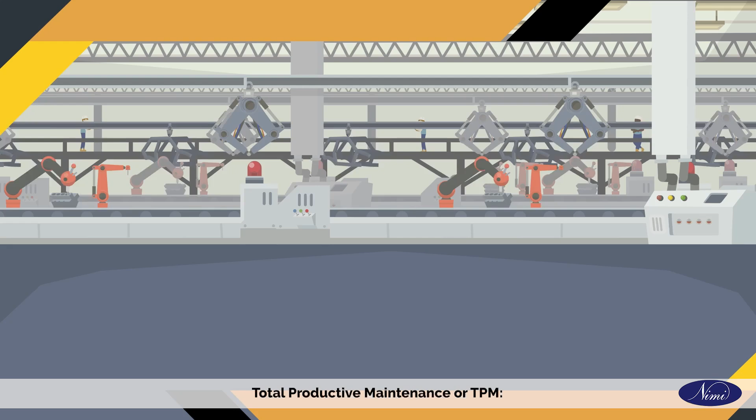Maintenance of machine involves regular servicing of equipment, routine checks, repair work, and replacement of worn or non-functional parts. In this video, we will understand the basic maintenance concepts like total productive maintenance, autonomous maintenance, and identification of defects in a lathe tailstock. Total Productive Maintenance or TPM

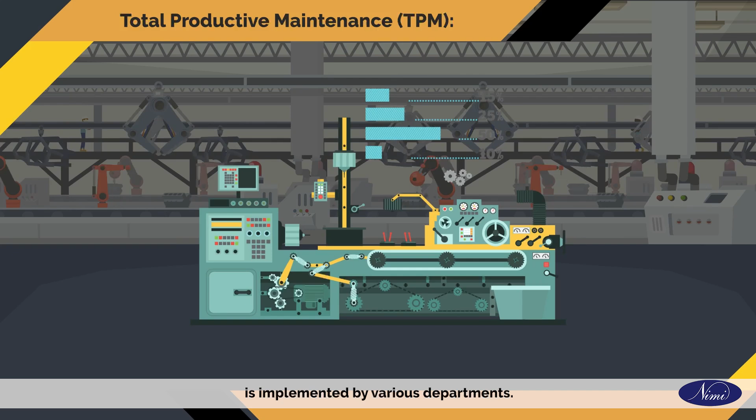aims to maximize overall equipment effectiveness, establishes a complete system of productive maintenance for the machine's or equipment's entire lifespan, is implemented by various departments: engineering, operations, maintenance, quality, and administration. TPM can be considered as the medical science of machines.

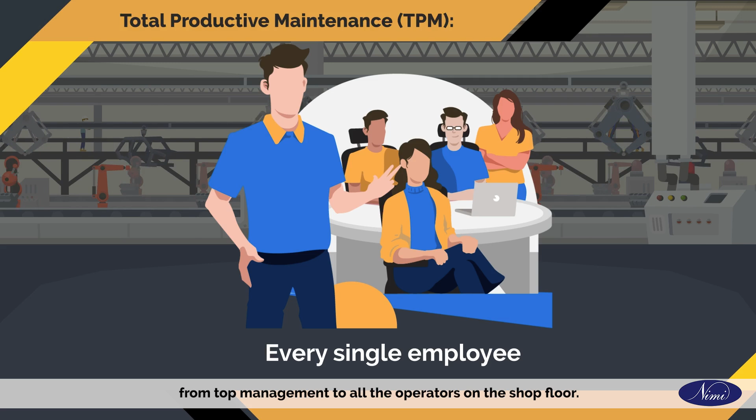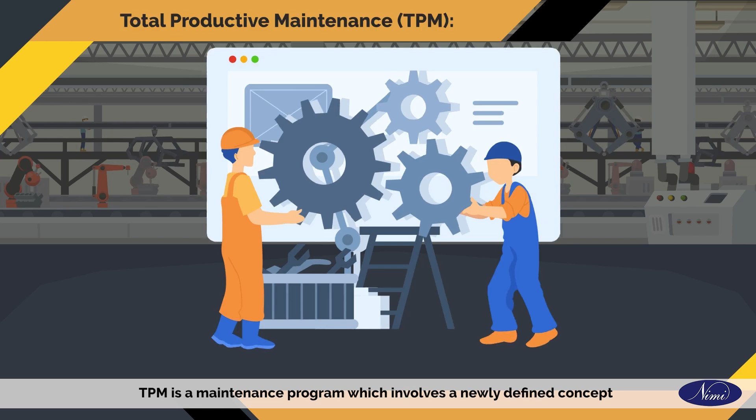TPM involves every single employee from top management to all the operators on the shop floor. TPM raises and implements productive maintenance based on autonomous small group activities. TPM is a maintenance program which involves a newly defined concept for maintaining plant and equipment. The goal of TPM is to markedly increase production while at the same time increasing employee morale and job satisfaction.

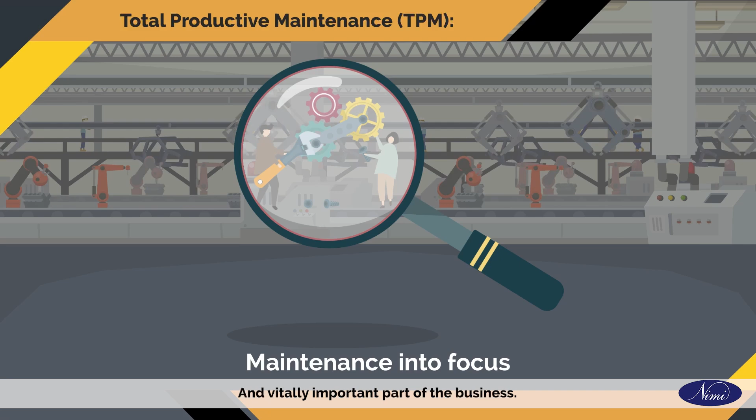TPM brings maintenance into focus as a necessary and vitally important part of the business. It is no longer regarded as a non-profit activity. Regular maintenance will minimize downtime of the machines and maximize production. The goal of TPM is to stop the emergency and unscheduled maintenance. Form different teams to reduce defects and self-maintenance.

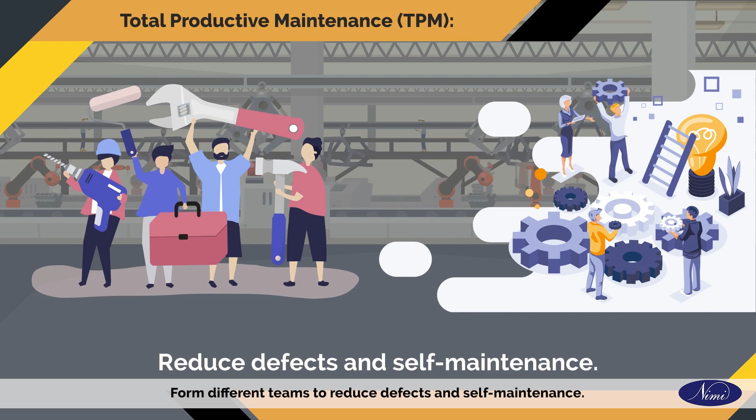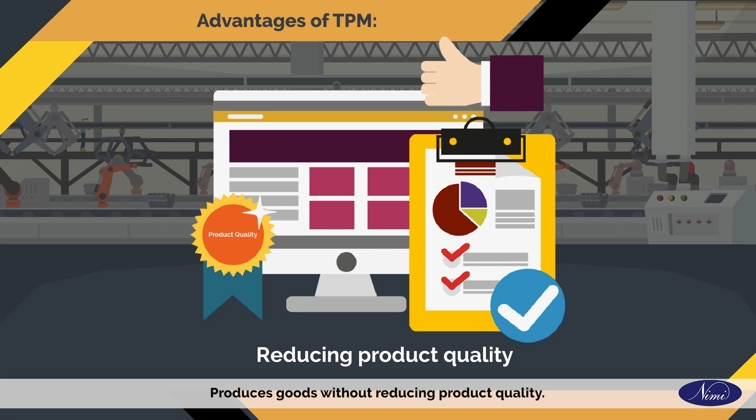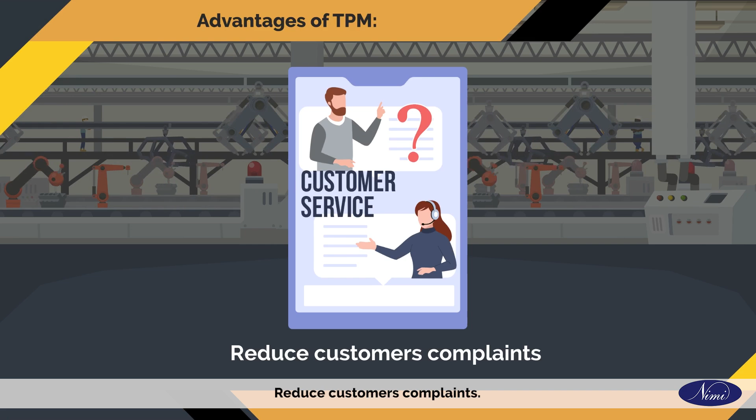Advantages of TPM: avoids wastage in quickly changing economic environment, produces goods without reducing product quality, reduces maintenance cost, produces a low batch quantity at the earliest possible time, ensures the non-defective goods to the customers, reduce customers' complaints, reduce accidents, follow pollution control measures, favorable change in the attitude of the operator.

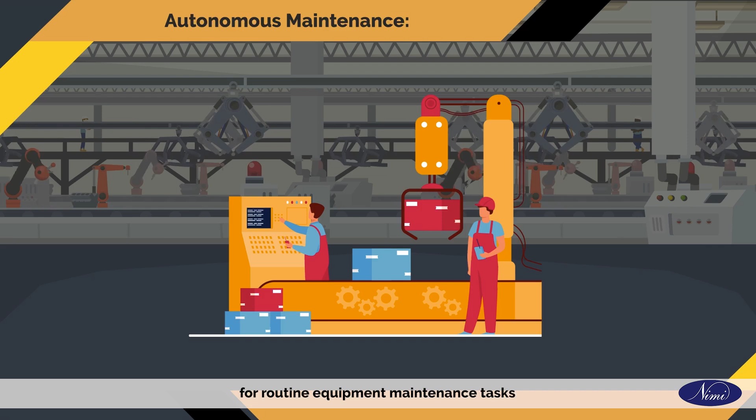Autonomous maintenance is a maintenance approach for routine maintenance tasks to keep the equipment in good condition and prevent breakdowns. Let us see the step-by-step improvement process and understand the equipment functions and safety risks.

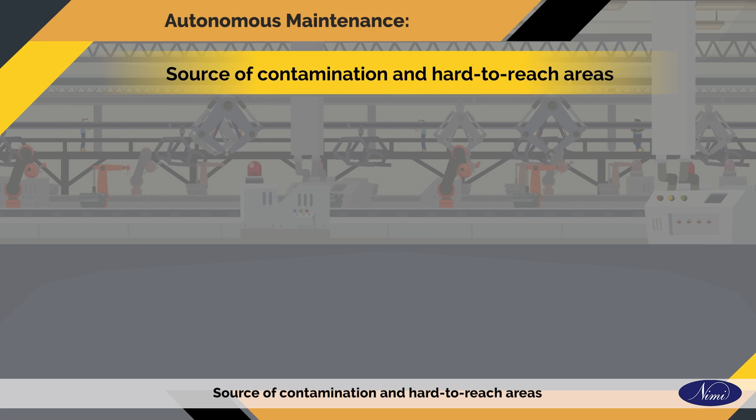The 7 steps of autonomous maintenance: initial cleaning, initial inspection and registration, detect problems of the lines and restore the original state, start managing the line autonomously, create and perform temporary cleaning or lubrication, source of contamination and hard to reach areas, solve by cleaning, inspection and lubrication.

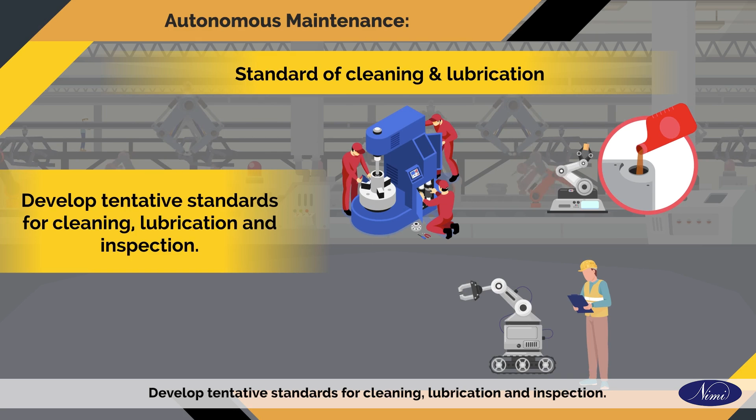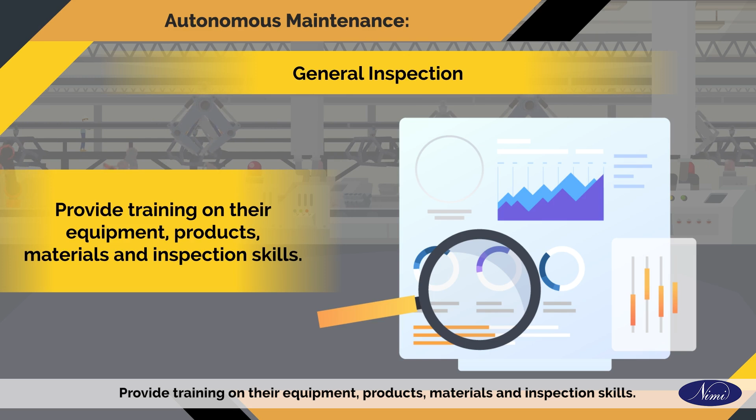Standard of cleaning and lubrication: develop tentative standards for cleaning, lubrication and inspection. General inspection: provide training on their equipment, products, materials and inspection skills. Autonomous inspection: develop a routine maintenance standard by operators.

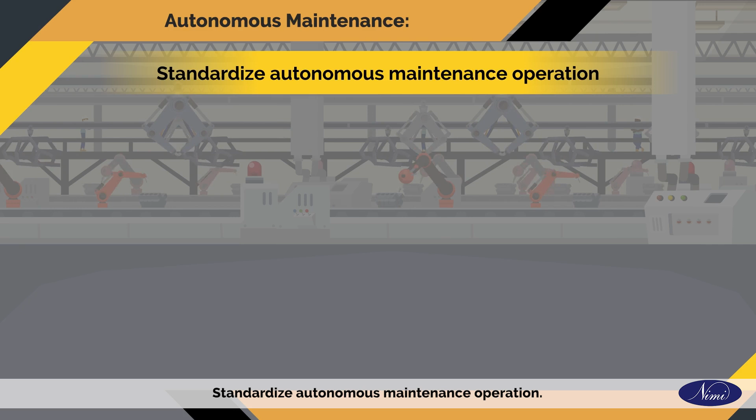Standardize autonomous maintenance operation: standardize routine operation related to workplace management such as quality inspection of products, life cycle of jigs, tools, setup operation and safety. Autonomous management: autonomous team working.

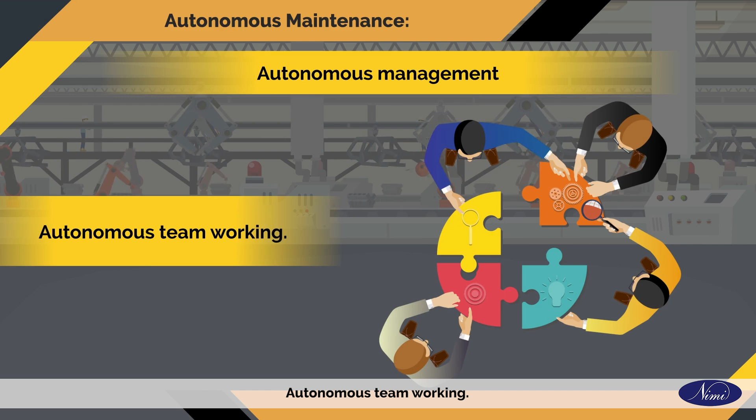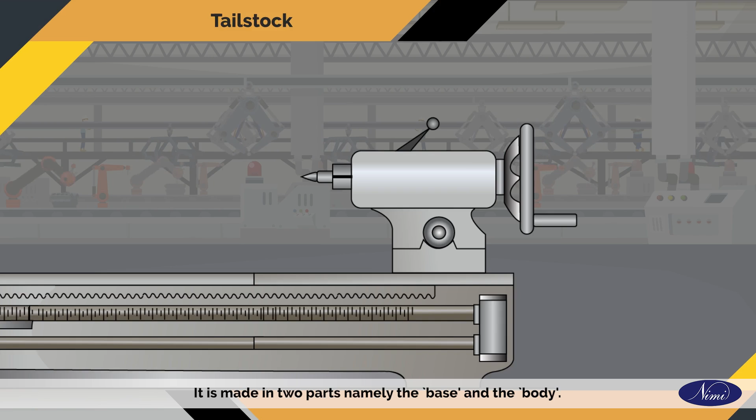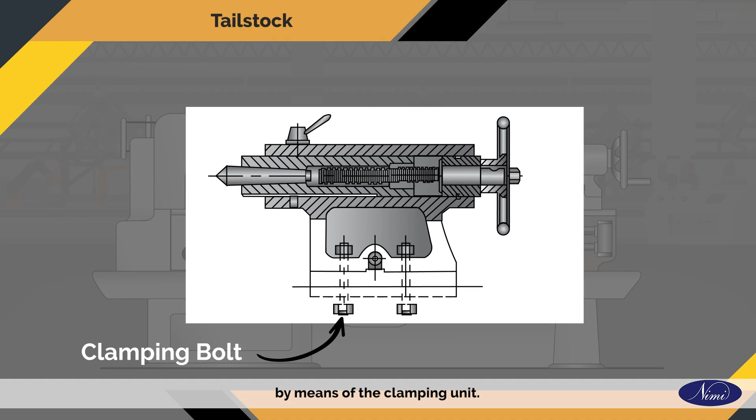Tailstock: It is a sliding unit on the bedways of the lathe. It is mounted on the right-hand side of the lathe. It is made in two parts, namely the base and the body. The base bottom is machined accurately and has V grooves corresponding to the bedways. It can slide over the bed and can be clamped at any position on the bed by means of the clamping unit. The body of the tailstock is assembled to the base.

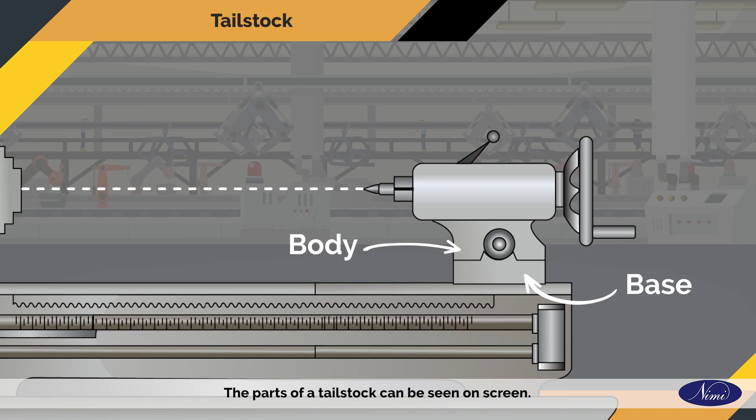Graduations are marked on the rear end of the base and a zero line is marked on the body. When both zero lines coincide, the axis of the tailstock is in line with the axis of headstock. The body and base are made from cast iron. The parts of a tailstock can be seen on screen. Purpose of the tailstock and functioning.

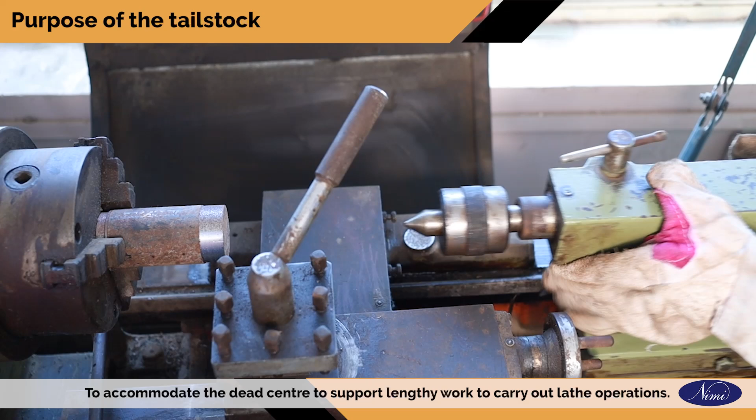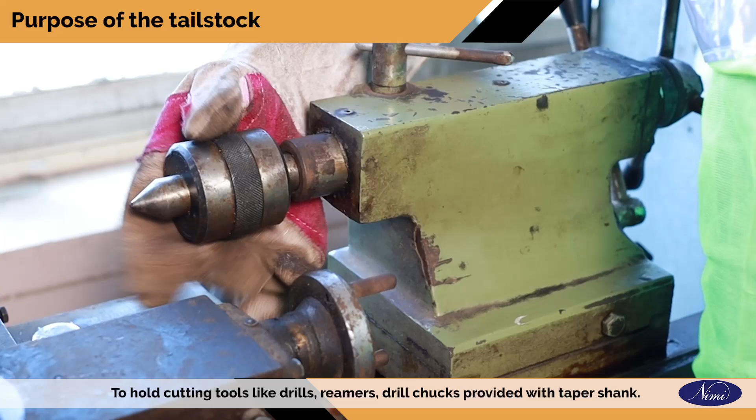To accommodate the dead center to support lengthy work to carry out lathe operations. To hold cutting tools like drills, reamers, drill chucks provided with taper shank. To turn external taper by offsetting the body of the tailstock with respect to the base.

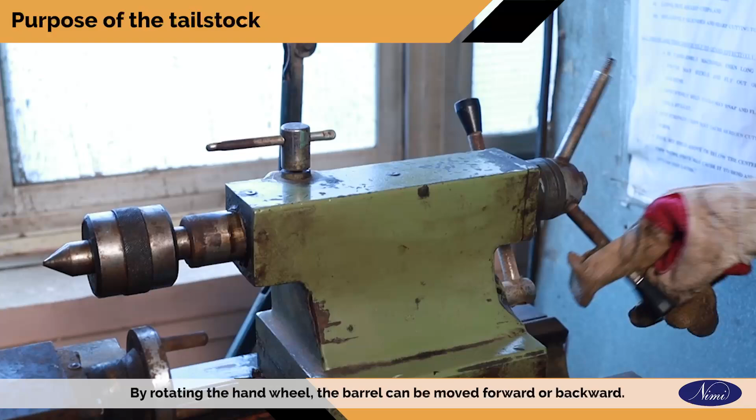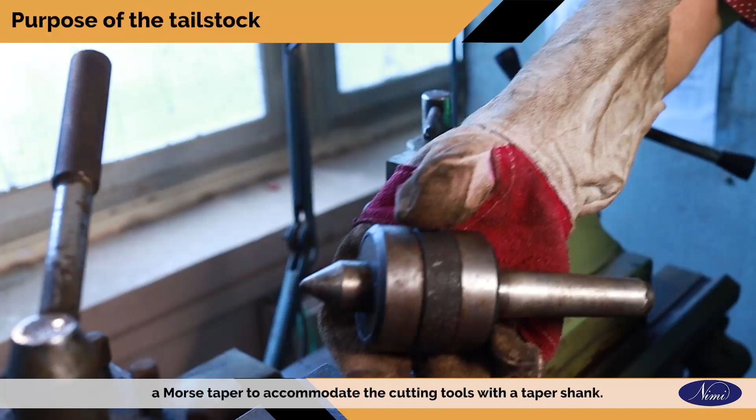Functioning of a tailstock. By rotating the hand wheel, the barrel can be moved forward or backward. The barrel can be locked in any required position. The hollow end of the barrel at the front is provided with a Morse taper to accommodate the cutting tools with a taper shank. Graduations are sometimes marked on the barrel to indicate the movement of the barrel.

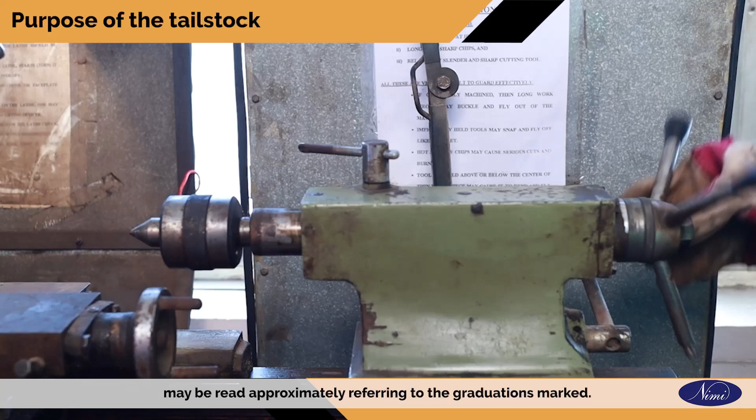With the help of the adjusting screws, the body can be moved over the base laterally and the amount of movement may be read approximately referring to the graduations marked. This arrangement is to offset the center of the tailstock as required for taper turning.

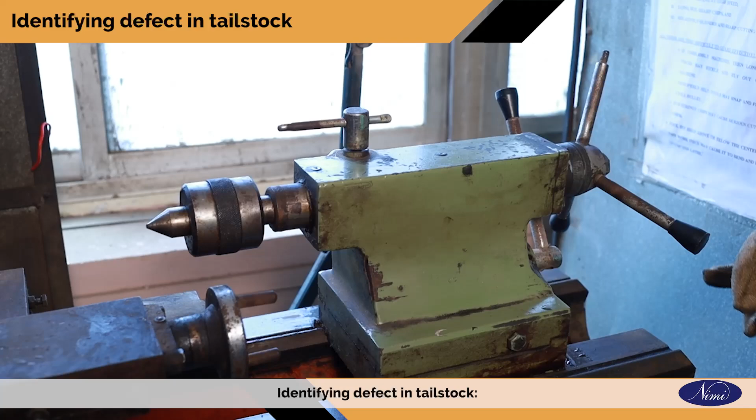Identifying defect in tailstock. Rotate the tailstock hand wheel for moving the spindle. Lock the spindle using the locking lever. Rotate the tailstock hand wheel and check the spindle movements and locking position. If the spindle is not locked properly, it will move. Hence, it is known that the screw rod spindle lock is not working properly.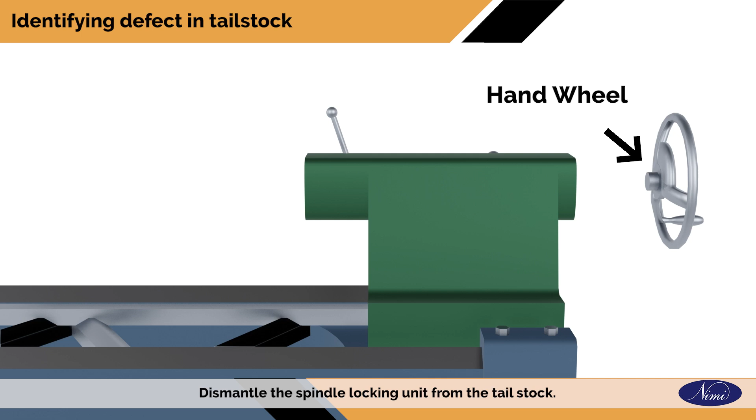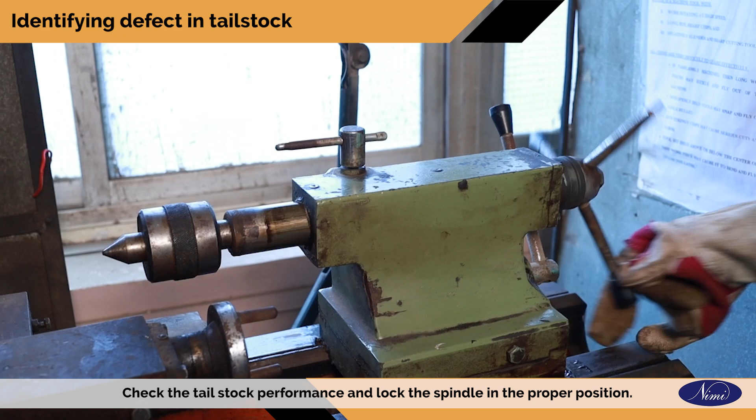Dismantle the spindle locking unit from the tailstock. Prepare the new screw rod instead of the defective screw rod. Assemble the prepared screw rod instead of the worn out screw rod. Check the tailstock performance and lock the spindle in the proper position.

In this video, we have learnt the importance of maintenance for the overall effectiveness of equipment, inspection and identification of defects in tailstock.